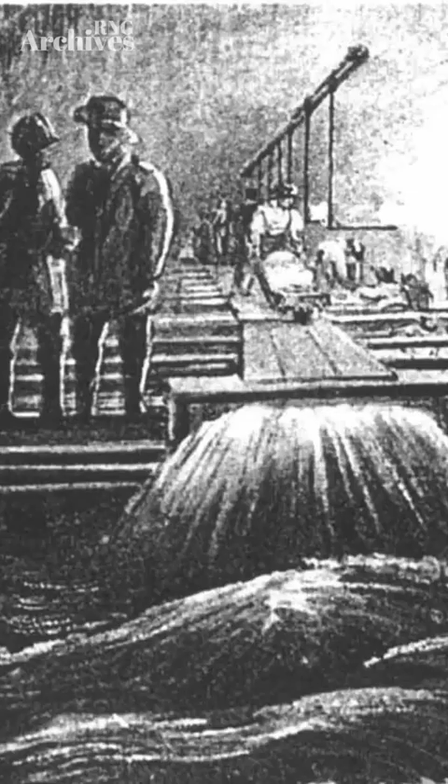Before 1876, waste was a public menace. Cities overflowed with cesspools, disease was rampant, and sanitation was a nightmare. London's infamous Great Stink of 1858, when the smell of untreated sewage overwhelmed the city, forced Parliament to flee and prompted urgent sanitation reform. Yet beneath this chaos was a biological process waiting to be harnessed: anaerobic digestion, the natural breakdown of organic matter, releasing biogas.

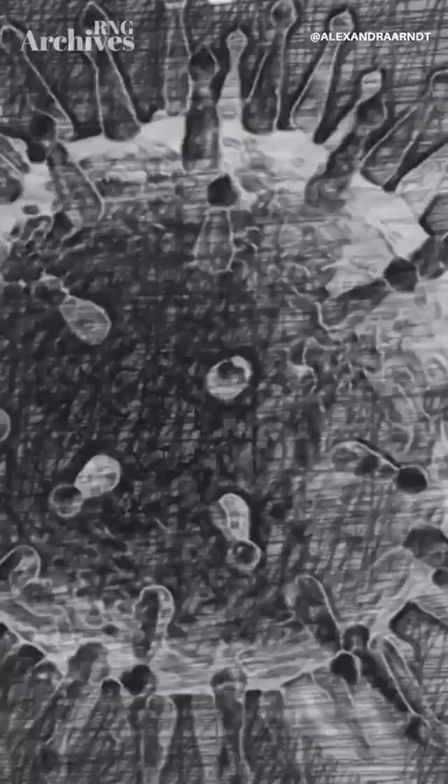But it would take a scientific leap to recognize the true potential. In 1876, German chemist Felix Hoppe-Seyler made a groundbreaking discovery: acetate in sewage sludge could be converted into equal parts methane and carbon dioxide. This was one of the earliest scientific confirmations of what we now know as anaerobic digestion. It wasn't just curiosity, it was chemistry proving that waste held energy. With that, the biological potential of sludge became a topic of serious scientific interest.

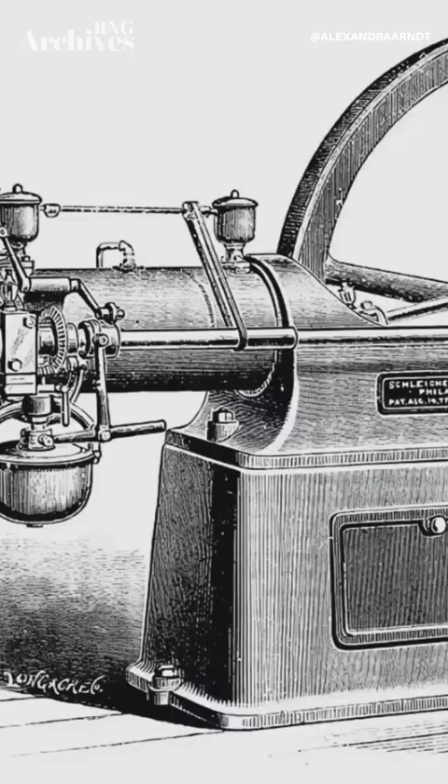The 1880s witnessed a rise in gas-powered technology. The internal combustion engine, then running on producer gas, was rapidly evolving. Though not yet fueled by biogas, these engines demonstrated the feasibility of gaseous fuels in powering the mechanical age. The bridge to renewable biogas was forming.

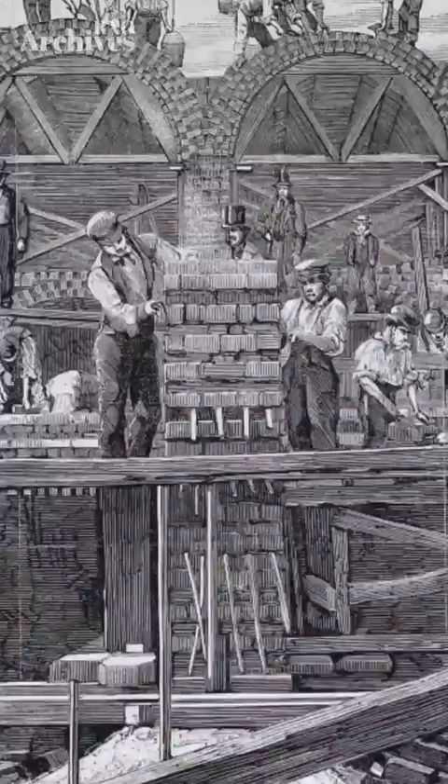In 1895, the city of Exeter, England, began using gas from sewage to light its streets. In 1897, biogas made its way to the Matunga Leper Asylum in Mumbai, India, where it was used to provide lighting as well. These pioneering installations demonstrated the practical and global promise of biogas, from Victorian England to colonial India.

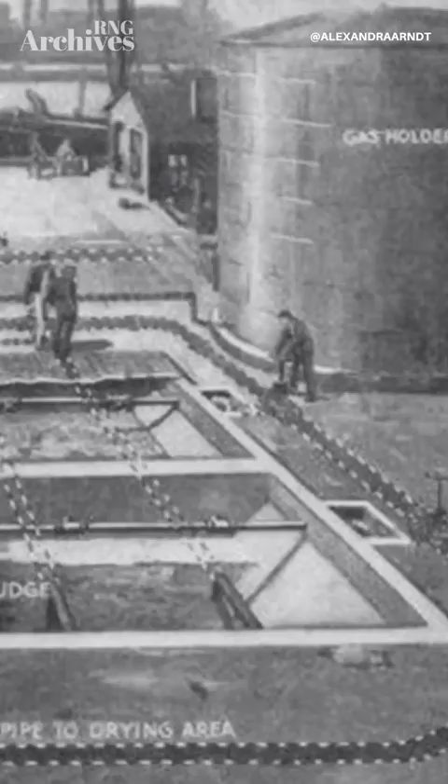By the turn of the century, biogas plants were spreading across England. Cities recognized their dual role in waste treatment and energy generation. Methane, once just a byproduct, was now a municipal asset, lighting homes and powering early infrastructure.

In 1904, Dr. William Owen Travis introduced a visionary design intended to improve upon existing contact bed systems, which were prone to clogging. Installed at Hampton, England, the system functioned as a multi-stage septic tank. The goal? Efficient separation, sedimentation, and hydrolysis, laying the conceptual groundwork for modern two-stage digestion.

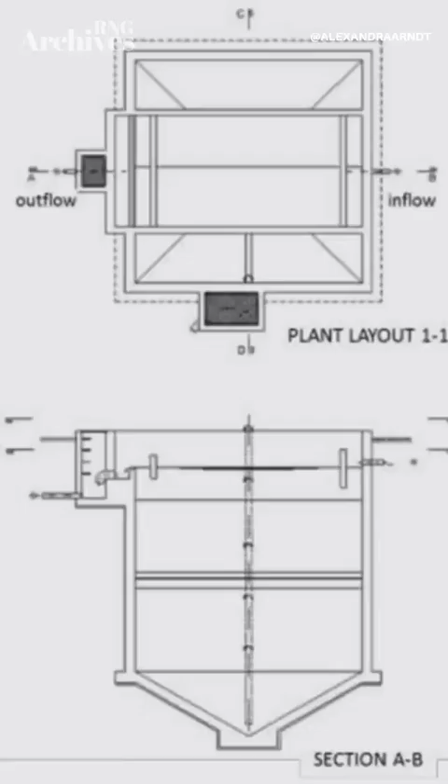Though the original Travis plant functioned only briefly, and only one more was ever built in Norwich in 1909, its influence was real. His successor, Karl Imhoff, went on to develop his own version, the now famous Imhoff tank. Travis's ideas may have been overtaken by others, but his contribution marked a critical shift toward engineered digestion processes.

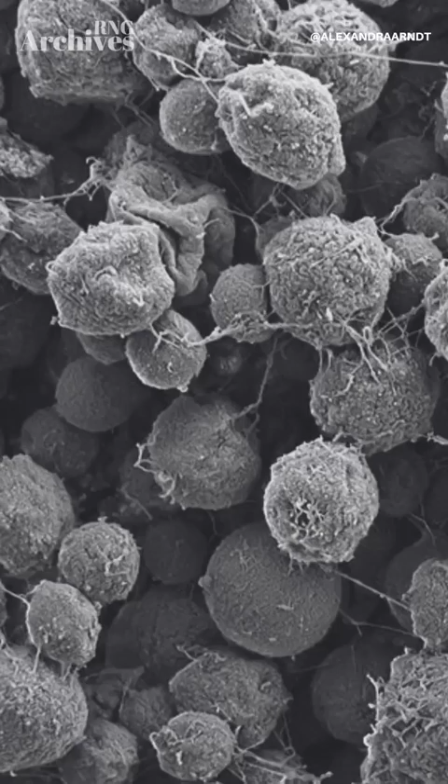While engineers built systems, scientists like Dutch microbiologist Nicolaas Louis Söhngen peered deeper into the microbial world. In 1906, he enriched two distinct acetate utilizing bacteria and discovered that methane could also be formed from formate, hydrogen, and carbon dioxide, uncovering core pathways in methanogenesis still taught today.

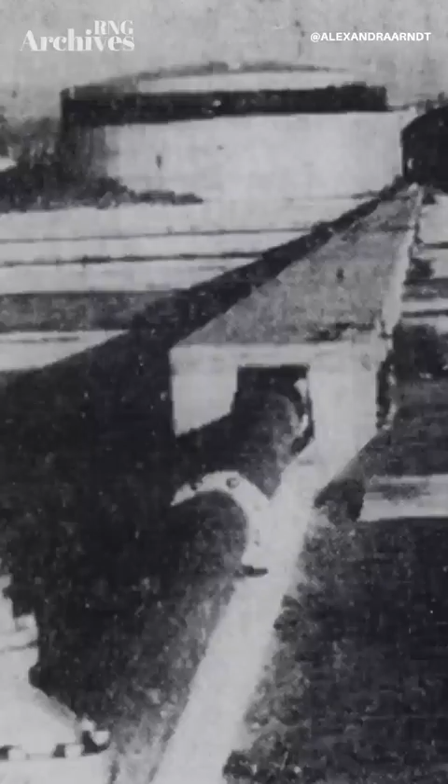From 1906 into the 1930s, England saw another round of bold experimentation. Large-scale sludge lagoons, passive anaerobic digesters, were trialed. Though initially plagued with failures, success came in 1911, proving that even nature's pace could yield scalable biogas systems.

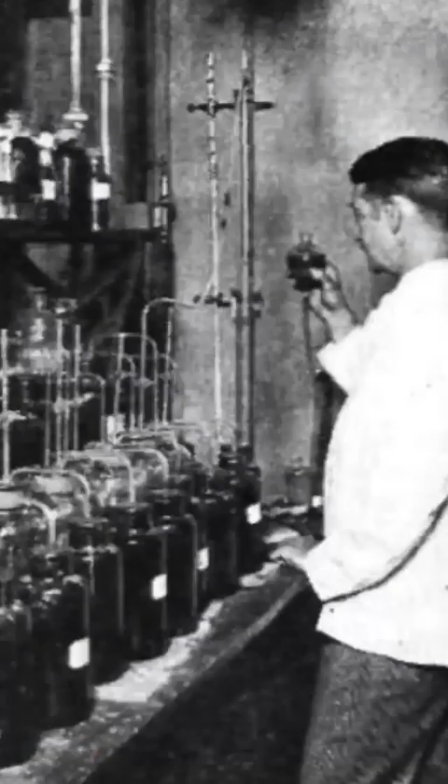Parallel to the success of the technology's rapid evolution, the field of microbiology was leaping forward as well. By the 1930s, scientists like Buswell and Hatfield identified key anaerobic bacteria and defined the environmental conditions needed to maximize methane output. Their discoveries shaped the modern understanding of what makes a digester thrive.

From septic tanks to city lights, this era saw a cascade of discoveries that redefined waste. These weren't just scientific events, they were technological detonations, a boom echoing into our century. The lessons of the Poo Boom live on.

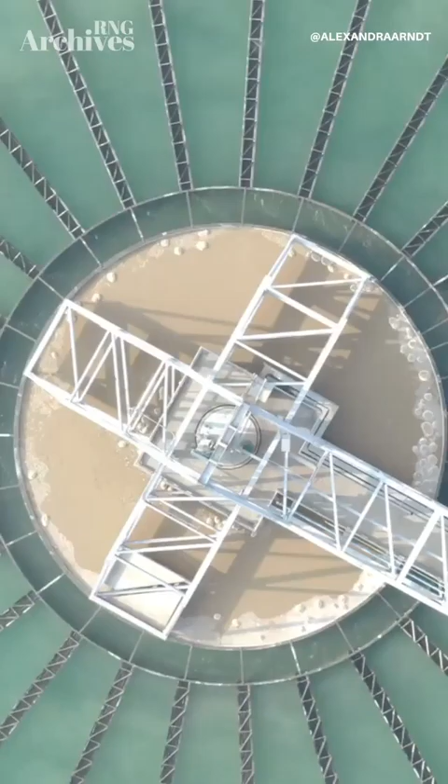Today's digesters still rely on microbial pathways identified by Söhngen. They operate on design philosophies seeded by Travis. They aim for community scale impact, just like in Exeter. If we want to innovate, we must remember we're not starting from scratch. We're continuing a legacy. We owe our roots to fearless thinkers, bold builders, and microbial masterminds. Their work turned waste into wonder. Now it's our turn to rediscover, reinvent, and reignite the next boom.